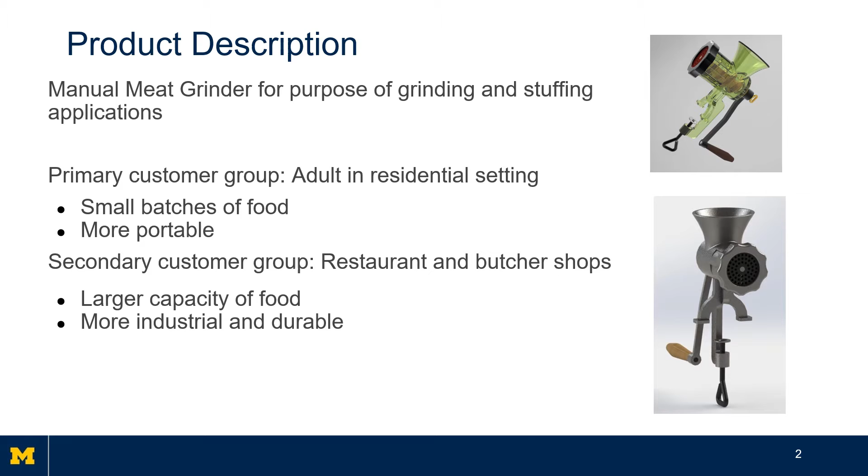Our secondary customer group are restaurants and butcher shops, and they're more interested in larger capacities of food and a more industrial and durable application.

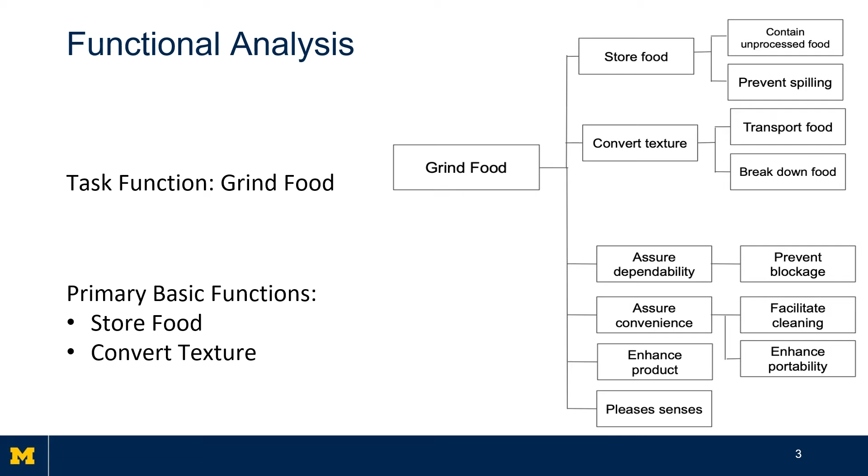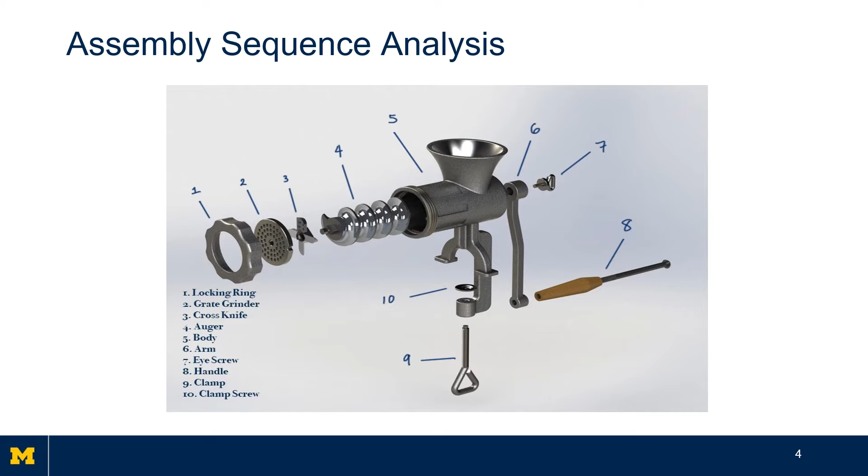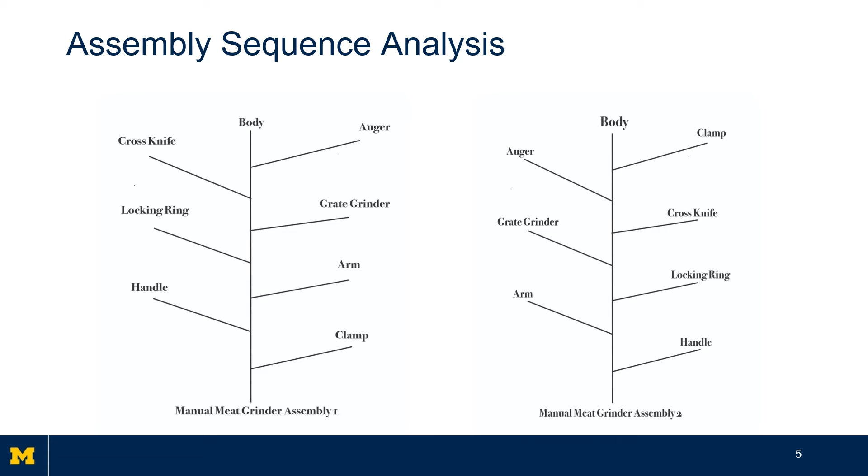These are the two feasible assembly sequences for the product. The auger, cross knife, and grate grinder have to be assembled in a specific order, which is seen in both sequences. The difference between these two is that in sequence 1, the clamp is assembled at the end, while in sequence 2, the clamp is assembled first.

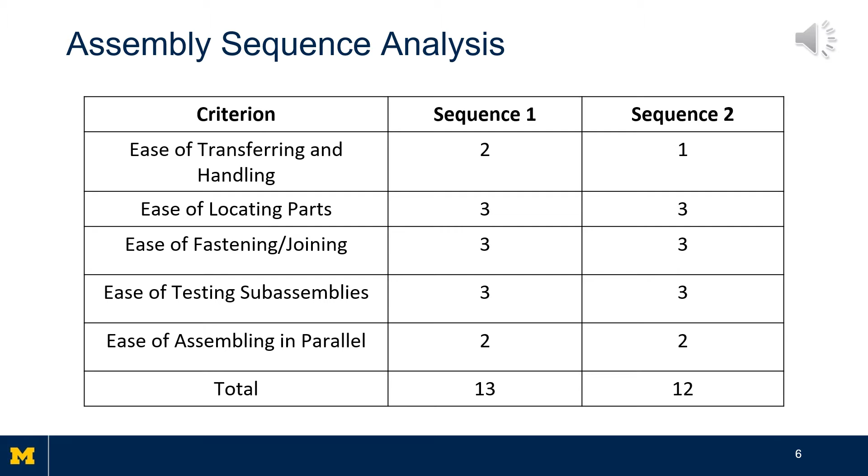Both sequences require you to hold and reorient the body when assembling different parts, which is why neither have perfect scores in ease of assembling in parallel and in ease of transferring and handling.

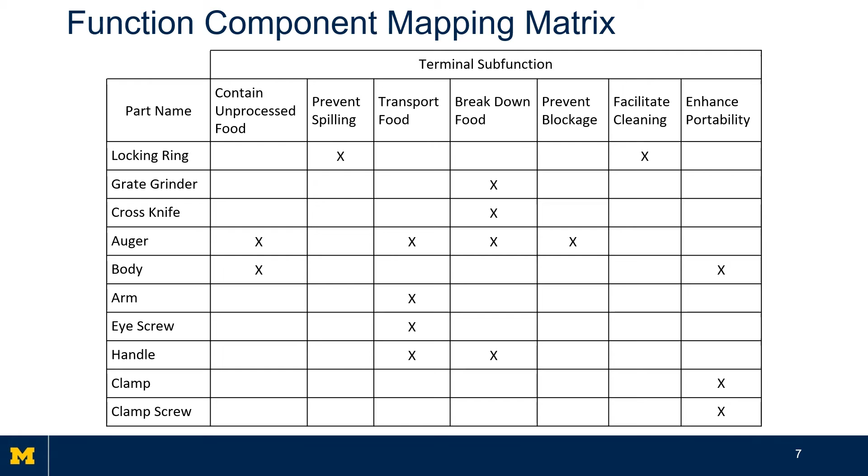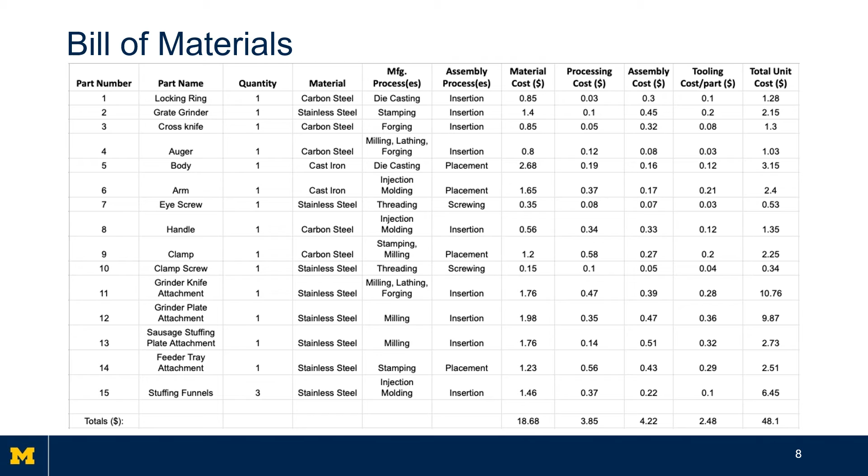The total manufacturing cost per unit came to $48.10. This is approximately 70% of the retail price of similar manual meat grinders and their attachments.

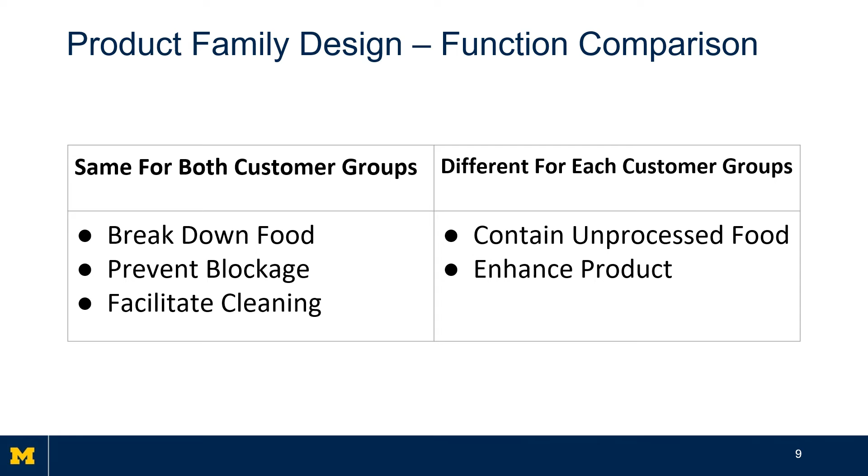Comparing the functions for each of the customer groups, the primary being household users and secondary being those who use it for commercial applications, we determined function difference occurs when containing unprocessed food and product enhancement, which is shown by the different components between our two designs.

Each of these designs shares the platforms listed on the left. The modules or differences in these designs are the feeder tray and the S-curved arm.

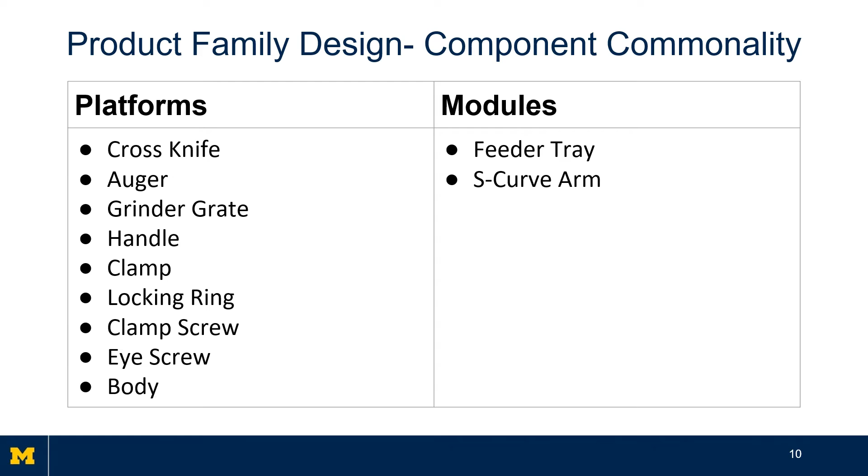The first module is the feeder tray seen in the center of the screen. This tray is easily attached to the neck of the grinder, allowing the user to feed the grinder larger quantities of meat faster. The second module is the S-curved arm. The new shape of this arm allows for greater torque, making the meat easier to grind for the secondary customer group.

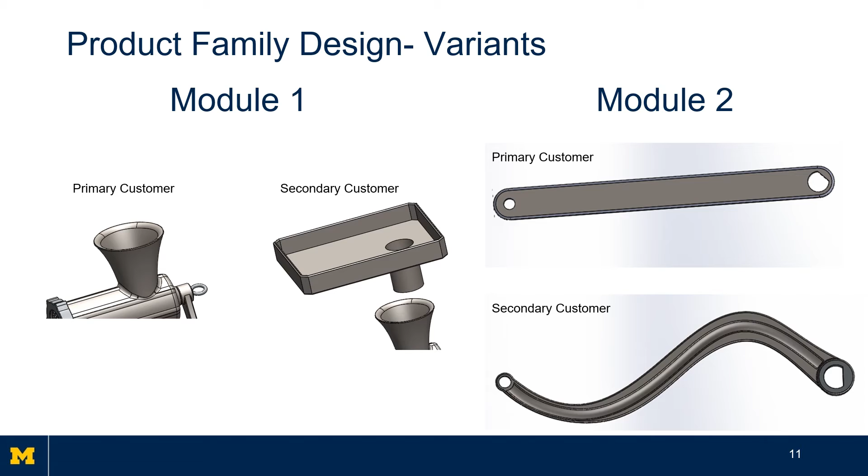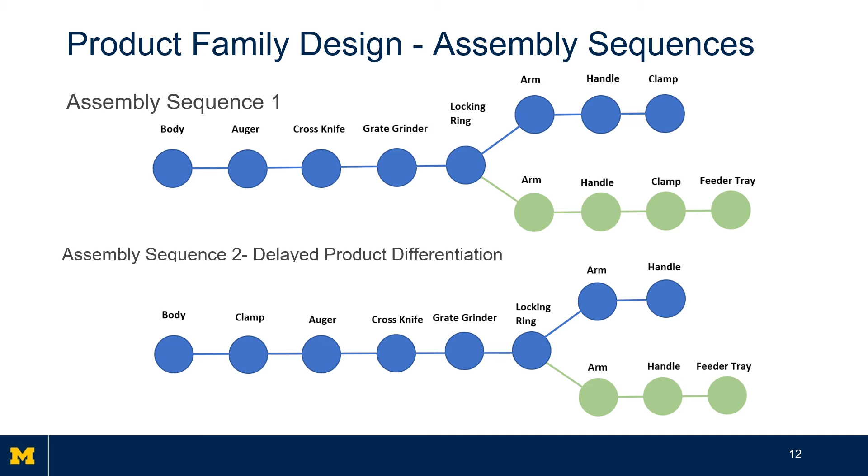Delayed product differentiation is essential to keeping the manufacturing process streamlined and efficient. In the first assembly sequence, you can see product differentiation occurs, but there is still a part added after the clamp that is common to both assemblies. By moving this common component to earlier in the series, we are able to streamline this process.

For design for manual assembly, we made 2 design modifications. The first modification is to the lock ring, which previously had a screw feature, and we added instead snap fits to the body so that this will in turn reduce time for insertion, which also aligns with DFA 11.

The second design change we made was to the feeder tray, and we redesigned it to be round and symmetric. This will in turn reduce our handling time, which aligns with DFA 6. You can see the photo on the bottom.

So both these design changes helped reduce our total assembly time and also improve efficiency. Our total assembly time reduced by 4.45 seconds and our efficiency improved by 2% by making these design changes.

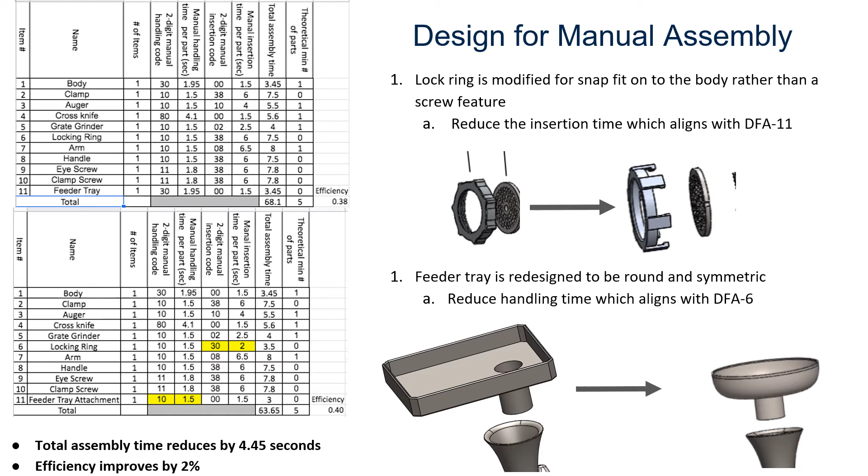For design for automated assembly, we made 2 modifications, both of which serve to increase the arm orienting efficiency and decrease its handling and insertion costs. The values highlighted in yellow in the first table—these original high-cost values are attributed to the unsymmetrical arm and the need to hold the arm in place in order to maintain its orientation.

To improve the efficiency and reduce costs, we modified the body following DFA 11 and added an alignment feature. With this, the arm no longer has to be held in place when being secured. The arm itself is modified following DFA 6. The non-standard hole in the arm is made symmetrical, making orientation much more efficient.

From the second table, which shows the cost of assembly for the modified design, we see that these modifications do increase arm orienting efficiency and reduce the arm total assembly cost by 51.1%.

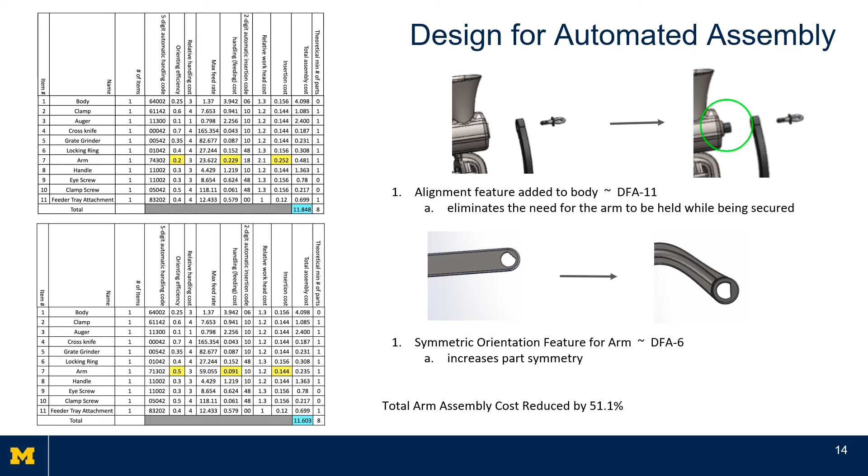After redesigning the feeder tray for manual assembly, the key geometry was the tray's bowl-like inner surface, which determines the amount of food that can be transported and broken down at one time. Note that transport food and breakdown food were component-dense functions in the function component mapping matrix.

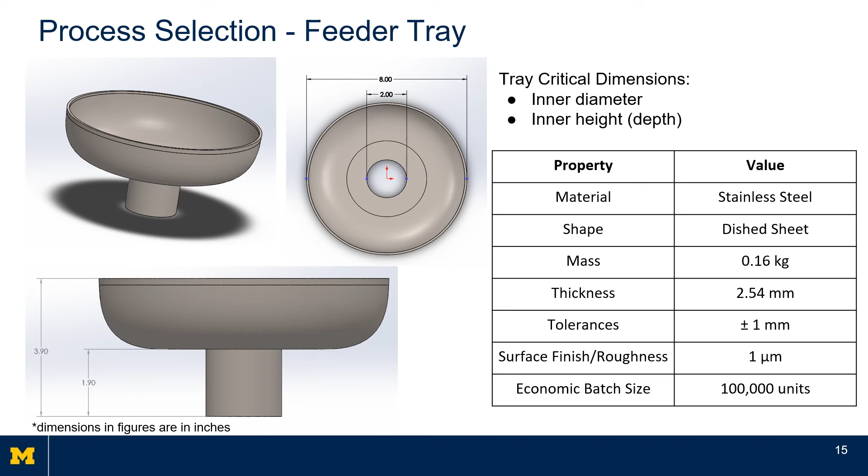The key dimensions to represent these features are the tray's inner diameter and inner height. For these dimensions, we require a tolerance of plus or minus 1 millimeter, and the remaining properties are shown in the table. Based on the property table on the previous slide, the possible processes are sheet forming and machining.

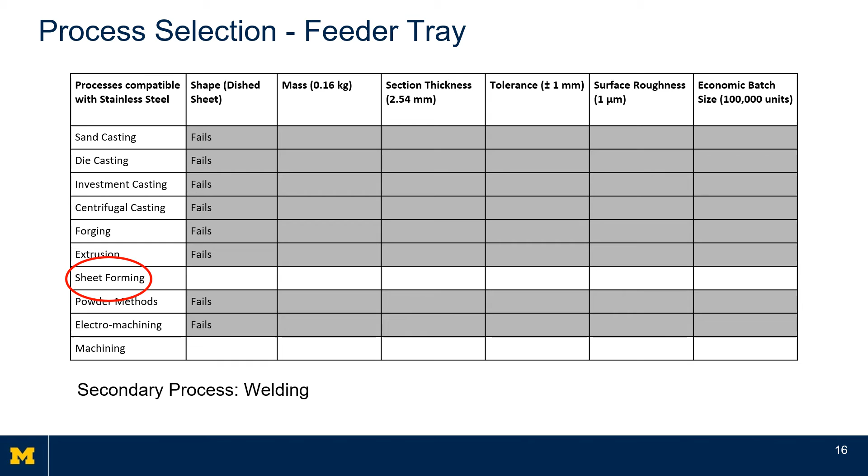We selected sheet forming due to the part's smaller thickness and sheet forming's ability to pierce and shallow form the bowl section of the feeder tray. Welding would also be required as a secondary process to attach the upper bowl section to the lower cylindrical section of the tray.

After redesigning the arm for automated assembly, the material of the part was changed to aluminum alloy as opposed to cast iron due to its lighter weight and its ability to withstand higher pressures.

The key geometry we focused on was giving the securing notch a more symmetric orientation rather than being at an angle to increase part symmetry. The key dimensions to represent these features are the securing notch's inner and outer diameters. For these dimensions, we require a tolerance of plus or minus 0.5 millimeters, and the remaining properties are shown in the table.

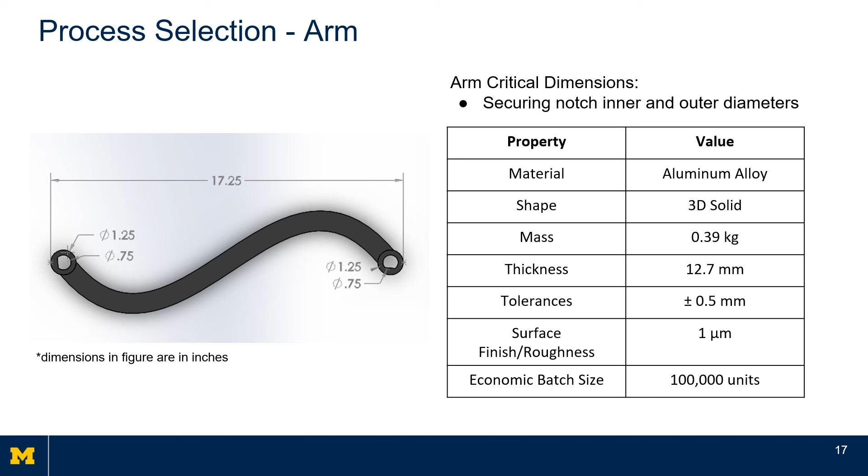Based on the property table on the previous slide, the only possible manufacturing process for the arm is die casting, which is also ideal for capturing the arm's curved shape.

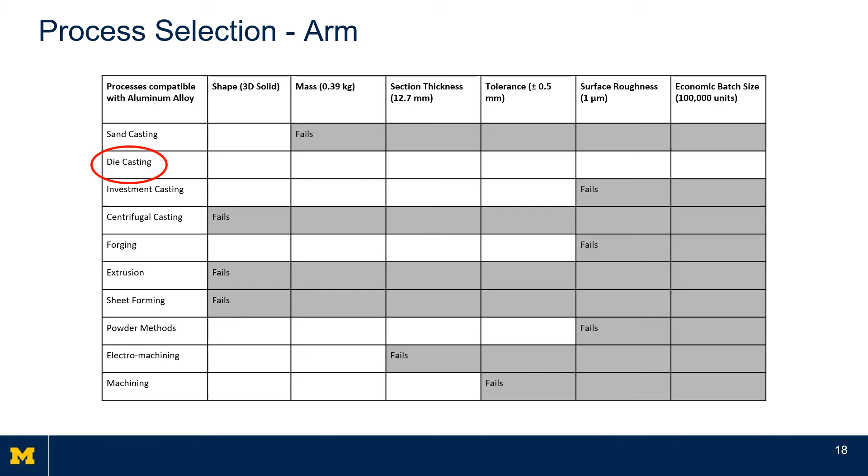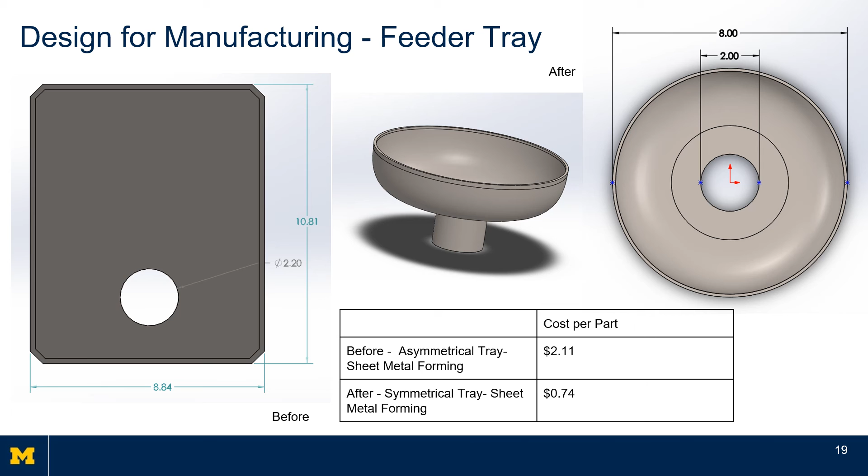The initial feeder tray design required multiple steps, bends, and piercings to create the shape using sheet metal forming. In the redesign shown on the right, we reduced the amount of individual bends and steps by having the metal pressed into a bowl shape. As seen in the table below, reducing these steps greatly reduces the cost per part from $2.11 to just 74 cents.

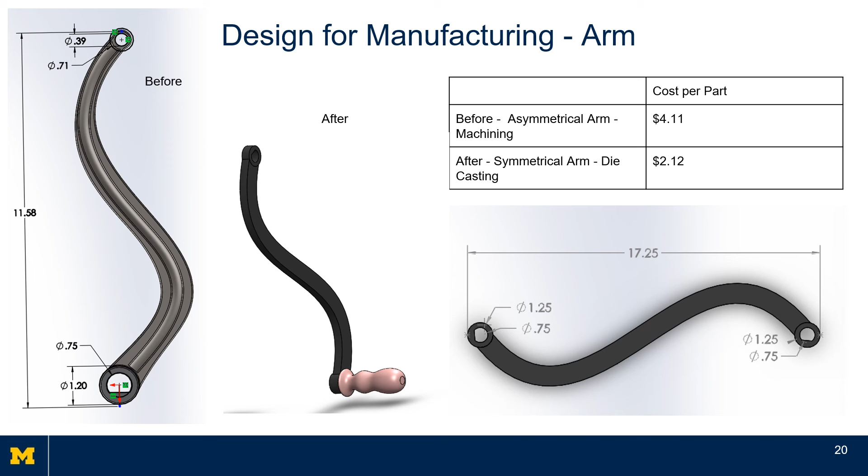The original design for the arm included details that required the arm to be created by traditional machining. In addition, the different sized holes and asymmetrical design added to manufacturing time and cost. By creating a simple symmetrical arm, the part is able to be formed by die casting. This reduces the cost per part by almost half.

For our design of a product service system, we decided to implement the free replacement of damaged meat grinder attachments and the inclusion of a tutorial book with the purchase of the product.

When a customer's attachment is broken or damaged, the company will send a free replacement. The customer will then send the broken part back to the manufacturer using the same packaging that the new part came in. This will result in a pleasant customer experience with the manufacturer and a decrease in the impact on the environment since the same packaging is used.

Once the manufacturer receives the damaged part, the part will be recycled and the material will be used towards making new parts. The tutorial book that is included in the purchase will give step-by-step instructions on how to properly use the meat grinder and its attachments.

This will show the customer that the company wants to ensure the user has a positive experience and will develop a relationship between the user and the company. The tutorial book will also guarantee that the customer is using the meat grinder correctly and will increase the life of the product, resulting in a decrease in cost for the customer since they will not have to replace the product sooner than predicted.

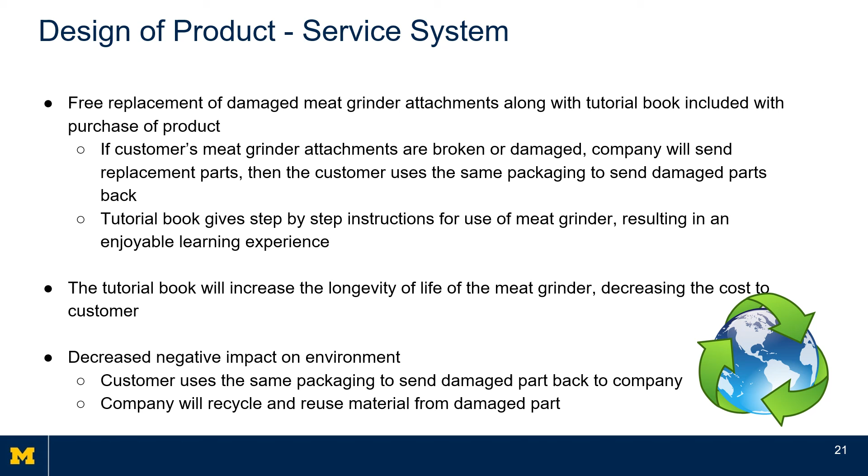Overall, the redesign of the meat grinder resulted in reducing the assembly time by 4.5 seconds through the reduction in insertion time of the lock ring and reducing the handling time due to the addition of the feeder tray. There is also a reduction in assembly cost.

Some pros of our redesign are the product can be easily disassembled for cleaning, only one fastener is required for each of the grinder, handle, and clamp, and the S-curve of the arm allows for the user to have more torque when grinding meat. Some cons are the force from the process of grinding meat can result in the snap-fit locking ring coming apart, and the addition of the feeder tray increased the number of parts from 10 to 11.

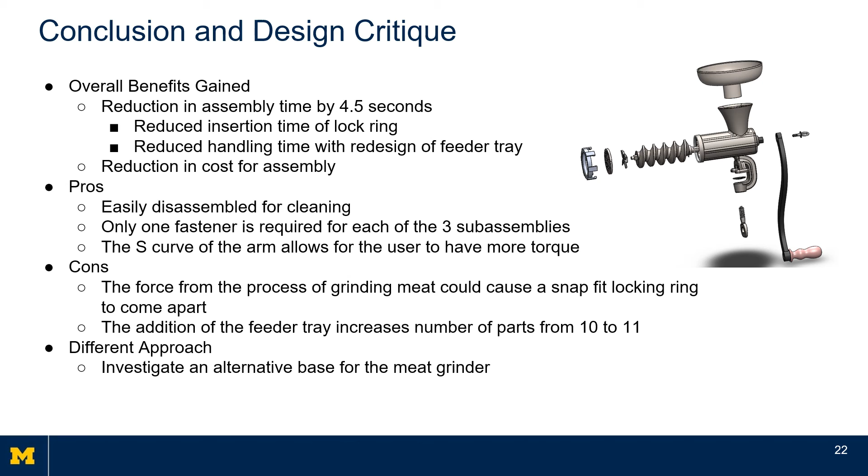If we had the opportunity to have a different approach to the product, we would have spent more time investigating an alternative to the base clamp of the meat grinder.